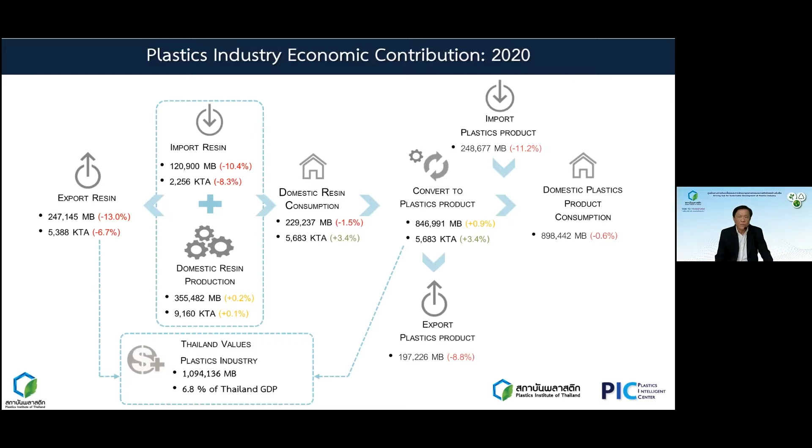The plastic product that we produce locally mainly go to the packaging, over 41% by the volume or the quantity. Following by the construction that cover the piping and the fitting, then electronic and electrical appliance, following by the automotive component, and the rising star is the medical device. These 5 sections cover around 80% of the total plastic product that can be produced locally.

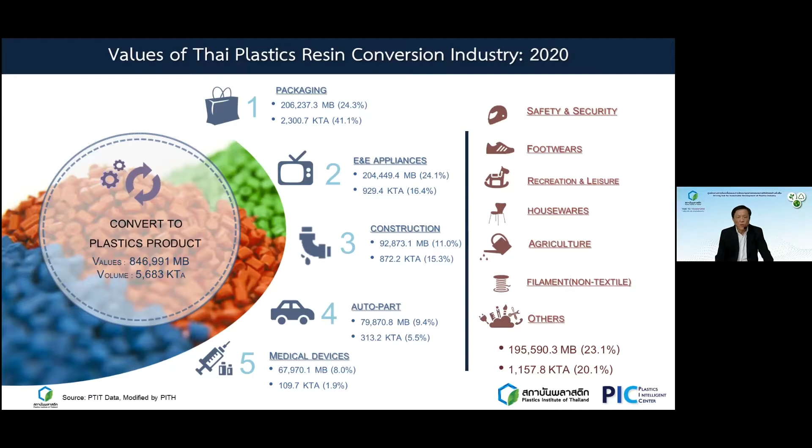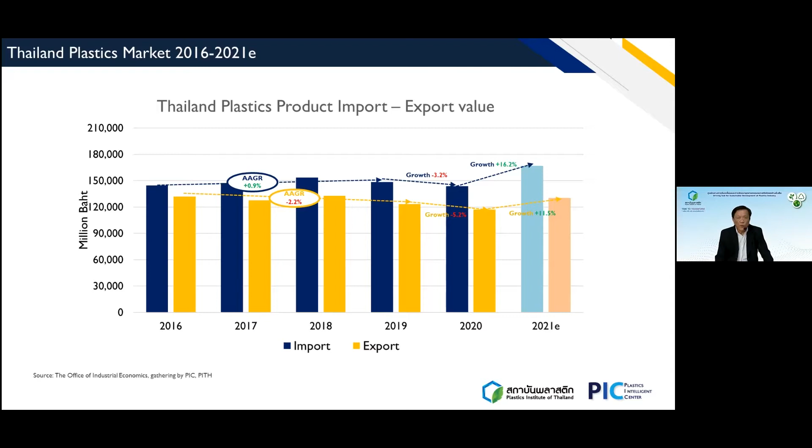So for the plastic product and even the other industry, Thailand and also the government have seen the importance and have put it as a national agenda that we want to be the smart manufacturing. How about the current situation in Thailand?

When we look at the plastic industry, the manufacturing that we have totally is over 3,000 manufacturers. We classify them into small, medium, and large by the number of employment. If the manufacturer has less than 50 employees, we call it small. Between 50 to 200, we call it medium. And over 200 employees, we call it large.

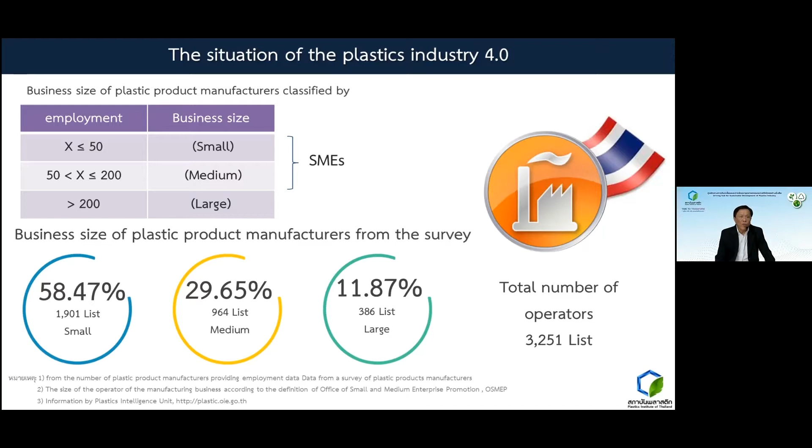Small enterprise already represents nearly 60% of the total, while the medium one is around nearly 30% also. Large one just represents only 12%. So overall, we can say that we have a lot of small and medium enterprises or manufacturers.

Thailand wants to move to the smart manufacturing. Let's see the history about the Thailand industry. We start with Thailand 1.0, that's been concentrated on agriculture. Even right now, Thailand also calls ourselves an agricultural country, but by the way, we want to transform ourselves to the industrial one. And Thailand 2.0, we start with the light industry and everything related to labor, since we have the labor intensive.

From Thailand 2.0, we step up to Thailand 3.0. We move it to heavy industry and also all the advanced machines. However, our goal is to move to Thailand 4.0, the creativity and innovation industry, and make us smarter through smart manufacturing.

Currently, over 80% of our manufacturing is still in the group of Thailand 2.0 and Thailand 3.0. We try to move ourselves, setting our goal as Thailand 4.0, and we hope it will happen soon.

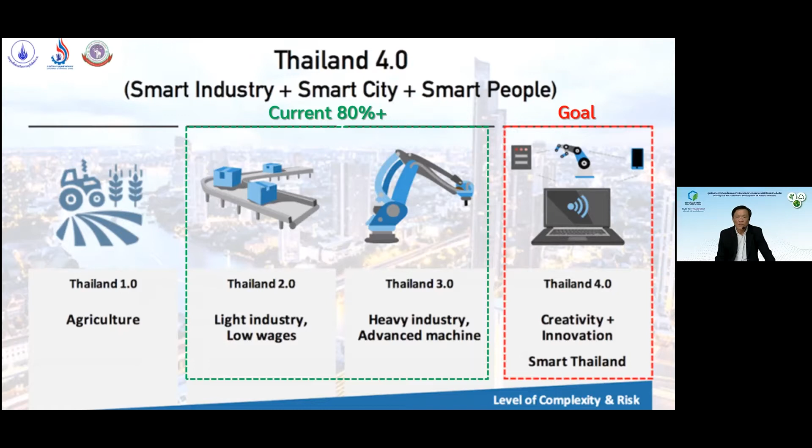From the business side, we have shown S, M, and L categories. Right now, S and M manufacturing represent nearly 90%, and all of them use old technology, old machines. Only the large manufacturing, representing 11-12%, use new machines and new technology.

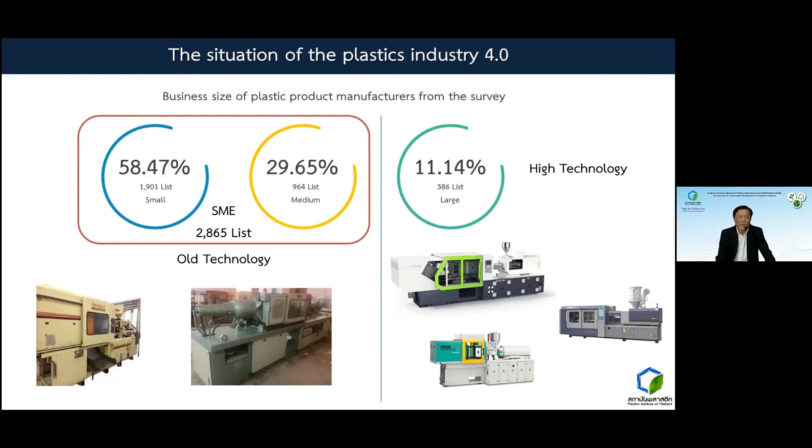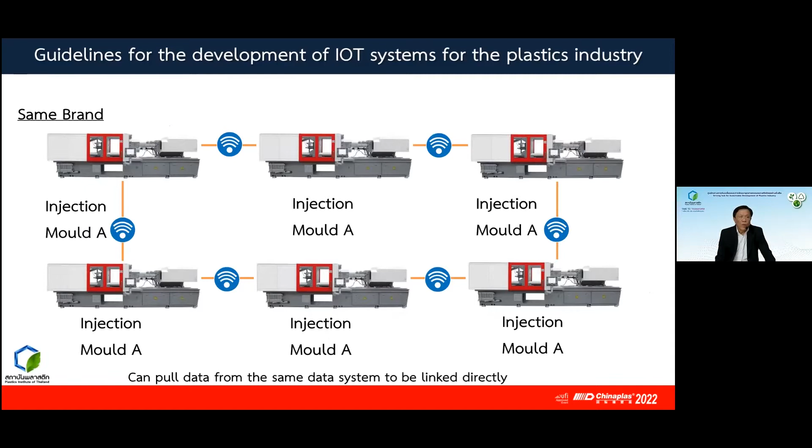That's why we face this issue when we want to move to smart manufacturing. When we talk about using IoT to connect all the machines, if they have the same brand, it's quite easy because they have the same language to communicate among themselves. But whenever we have different brands, different technology, or even different processes, we face the problem of how to connect all of them and let them speak to each other by themselves.

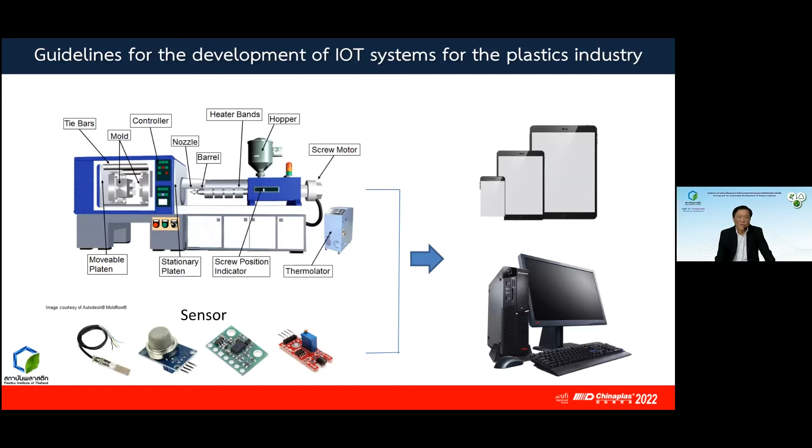That's why we need the technology. We need to implement IoT tools and equipment to install or fix onto the existing machines and make it digitalization.

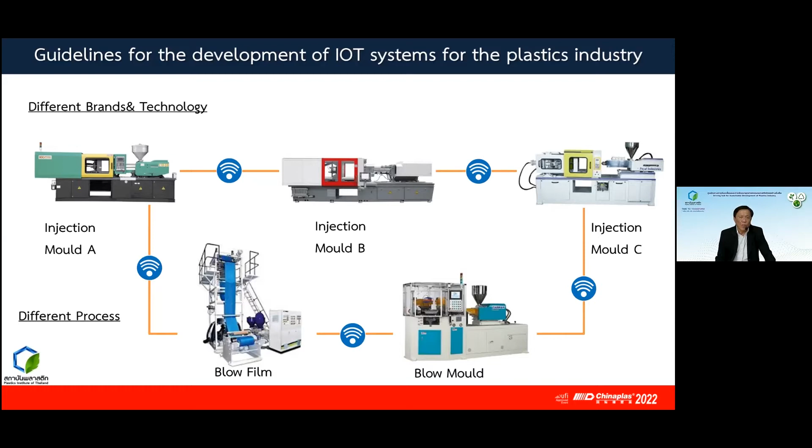With that, we believe that even with different brands, different technology, different machines, we can let them use the same language and communicate among themselves. This will increase the efficiency and effectiveness of the production and manufacturing.

Since the government has seen the significance of smart manufacturing, on the government support side, they provide consulting as well as knowledge to the manufacturers, and even share certain budget to upgrade and leverage the capability of manufacturing.

The government side as well as the manufacturing side have seen the same problem, meaning we talk about soft loans - how can they get lower cost for investment? By the way, getting tax privileges to give them some holiday during leveraging or upgrading their manufacturing.

So to upgrade to smart manufacturing, we have seen both challenge and opportunity. The challenge is that we lack knowledge - what kind of smart technology we should have, and the know-how on how to implement and utilize it. We face limited proper equipment, as I mentioned before we have faced high investment cost, and even right now labor is also in shortage.

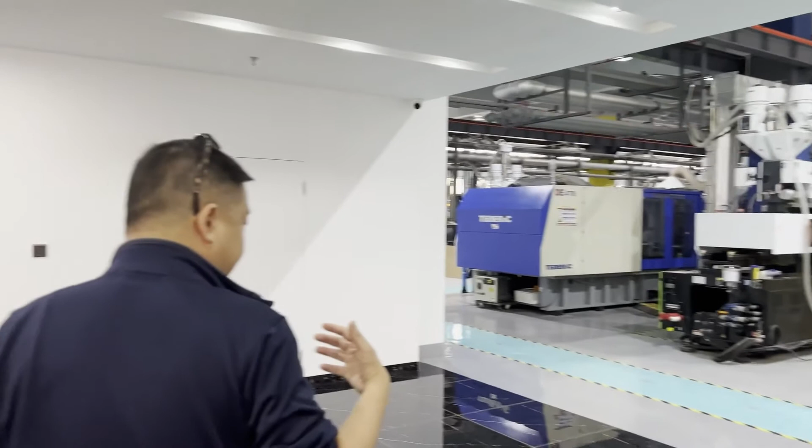At the end of the day, with such a manufacturing facility, this is a dream for many small micro converters, and it will take them quite a lot of effort if they wanted to build one themselves. By having a shared facility like this, it allows them to benefit from a digital factory at a fraction of a very small cost. This backdrop here is our experience in the past 18 months building these facilities.

Now we feel that to have a breakthrough in tackling the challenges faced by medium, small, micro companies in digital transformation, there should be a system engineer. Over here we say it should comprise industrial engineering, economic modeling, multi-skill talent, digitalization, and government services.

Over here we hire two groups of people. These are technicians with experience, born in the 70s and 80s, and these are also very young students that we now work with the school. They are born in the 2000s, very young age, 16, 17, 18.

We are trying to implement the German dual-track education system over here in Jieyang.

Why is it so difficult to actually implement such a system in traditional manufacturing in Asia? Because most of the companies are very small in size, and they do not have the infrastructure or the talent to do the German dual-track education system.

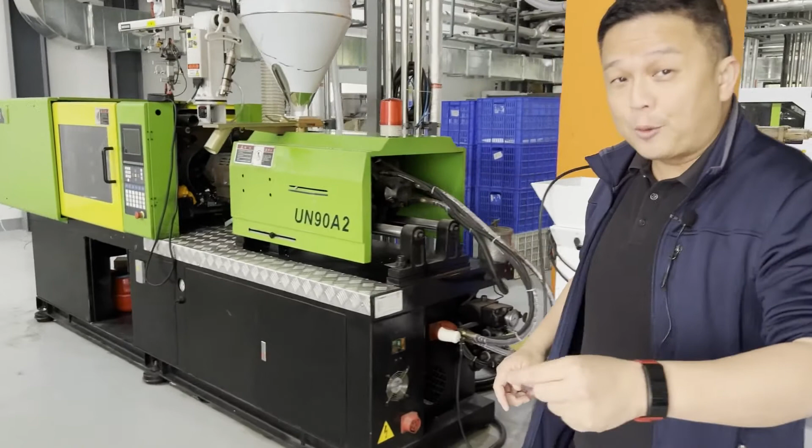We also say that if the industry, by and large, is not even automated, by letting them work with the schools, how can we then train 4.0 students? So we said that if the industry is 2.0, after they work with the school, it's never possible to train 4.0 students. So there's always a gap on employability of such students.

These facilities now, we have got all 31 machines digitally connected to the platform. So in this control tower, we can basically track quite a lot of data. All the machines are connected via the OPC UA standard, so we can do predictive quality in our manufacturing process.

What does this mean? Traditionally, maybe one technician can look after 10 machines. So when we have a technician plus a smart process monitoring software, can we then put a challenge that this technician should now look after 100 machines?

We built a very simple staircase gallery to just make full use of the space here.

In this wall here, we explain why the young generation doesn't want to go into manufacturing, because they have requirements on the environment, requirements on the salary, it cannot be too low, and plus I think they also, not like us when we were young, want to work long hours. So manufacturing has to change in order to attract the younger generation to come and work in the factory.

And we realized that not only do the students not want to work in the factory, their parents, who have been working in the factory for the last 20, 30, 40 years, also don't really like to see their kids go and work in the factory.

So we have this very awkward situation: when factories face labor shortage, their solution is to invest in automation. But the question we put to this converter is, if you already have trouble hiring general workers, what makes you feel you will now have the ability to hire skilled technicians?

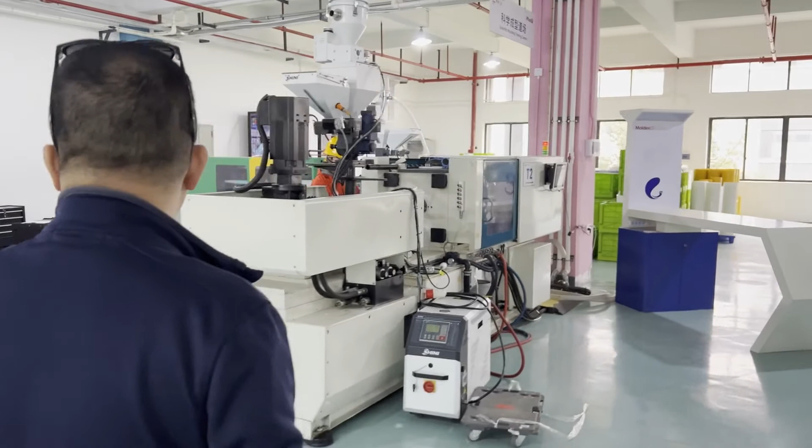They work in the future factory environment. So here we have 3 molding machines. We use them to do scientific molding training.

We have an automation training center where we have a swing robot, articulated robot, both industrial and collaborative, and also linear robot. Recently we invested in 2 more stations to train application of industrial robot. This place is also a licensed training center by the government.

So we have come to the end of the tour. I thank Adsale for inviting us to share with you our experience in smart manufacturing for the plastics industry. We are only 18 months into the operation.

There's still many things we can do and we will do, and we encourage more partners, either from the machine side, software side, or even the converters, to join us, because I think this is one very interesting project.

We are embarking on the Industry 4.0 journey together. Thank you very much, and I look forward to taking more answers and questions.

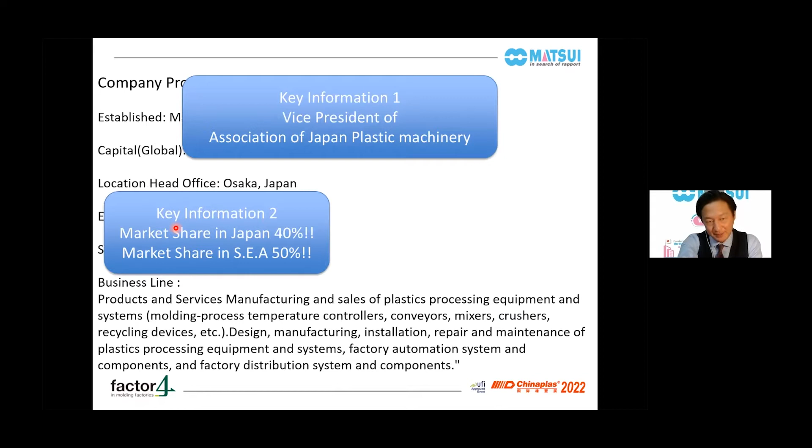And market share in SEA, the Southeast Asia region, approximately 50%. The third key information: we have a strong relationship with Japanese automotive manufacturers, especially Toyota and the group companies.

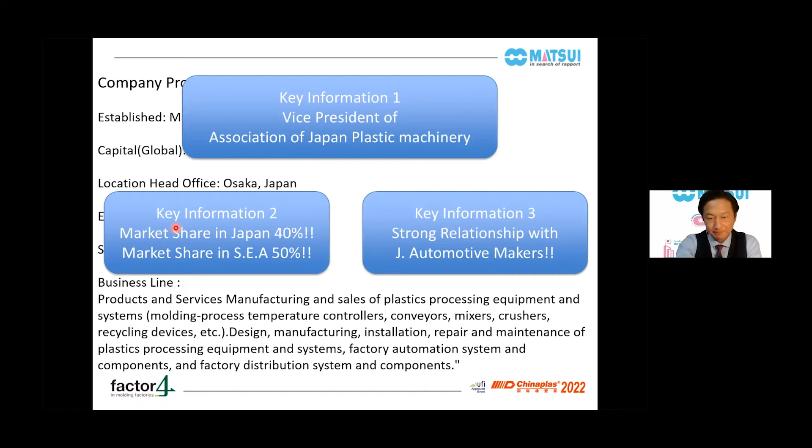One in Korea, one in America, one in Thailand, and one in India. Basically, we provide our equipment to the Southeast Asian market from Thailand or China, and provide installation and after-sales support.

That support is provided at each country locally.

Okay, let's get started on the main topics. First of all, let me share my idea through my activity and research about this topic since 2016.

Every player in the industry is saying IoT, Industry 4.0, and digitalization are mandatory for our future, especially after 2016.

There are a lot of services now, technology, software, and devices already in the market. But the main topic is usually how to connect the machine and how to upload the data, rather than the discussion of the purpose and the object of each molding process.

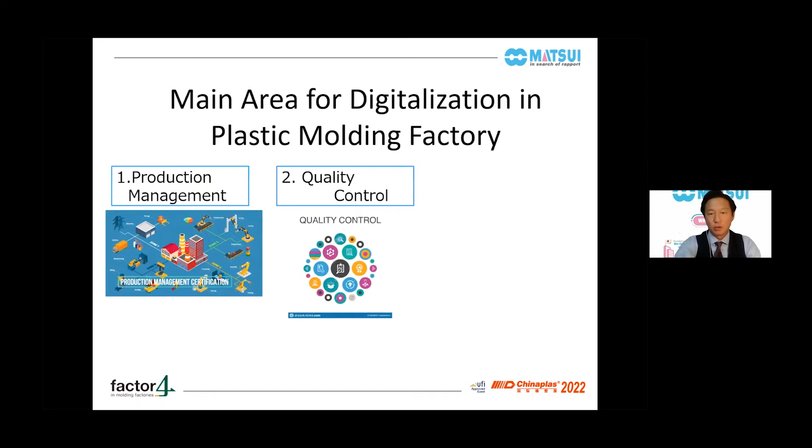And third, machine maintenance. Basically, these are the three main areas for digitalization in plastic molding factories.

Each area requires different parameters and information because of different objectives. For example, production management requires things like cycle time, material consumption, shot count. Quality control...

requires screw position, injection pressure, mold temperature, and machine maintenance covers motor failure, vibration, or the temperature of the heaters, and so on. So these parameters have to be matched with each area.

Basically, the cycle time information doesn't work for quality control or something like this. So that's why...

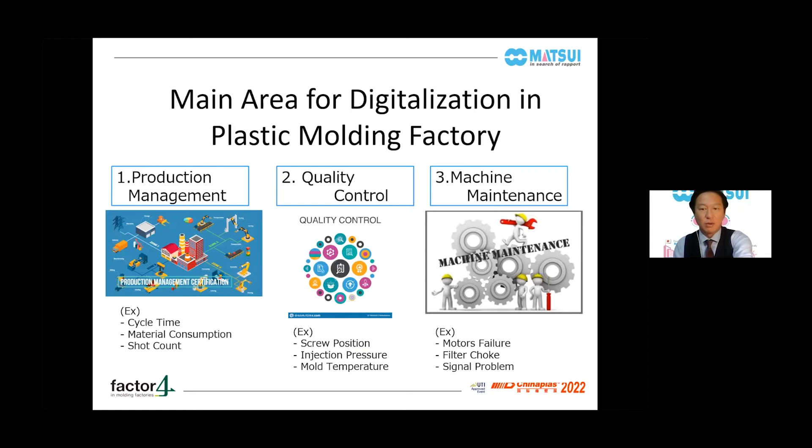we need to think about the target object clearly and implement the solution specifically. Then it's much easier to start, and also can save a lot of cost because of the small investment.

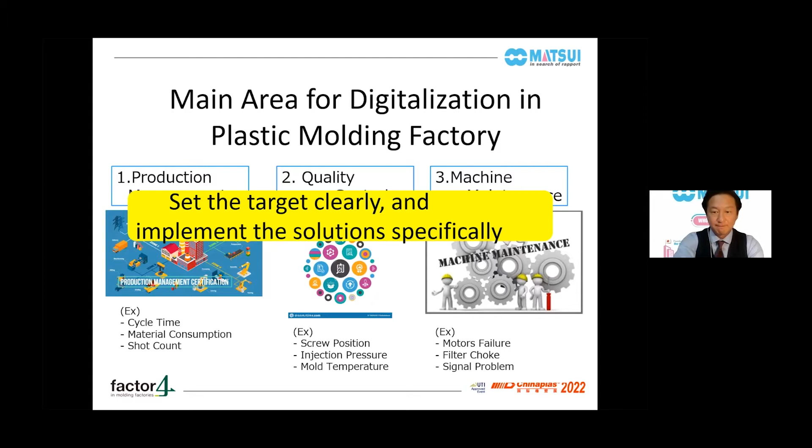Okay, but there is an obstruction to digitalization in the plastic molding factory. Obviously, there are two huge difficulties for implementing IoT in the plastic molding industry.

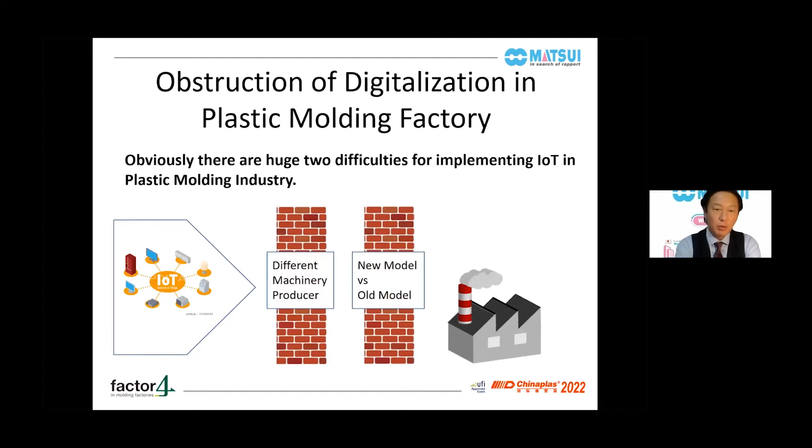The first, different machinery producers, and second, new models versus old models. This means each machinery manufacturer, like us, provides its own software, device, and services.

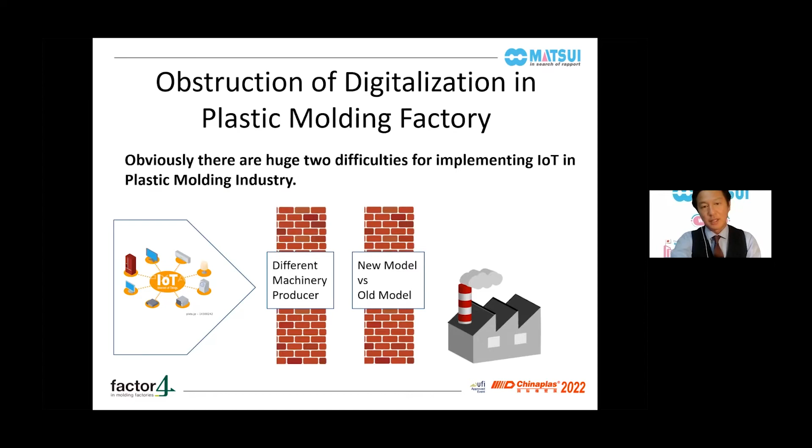Let's say the new machine is only available to communicate and give data, but the old machine is not able to do so. That's why there is no platformer in the industry.

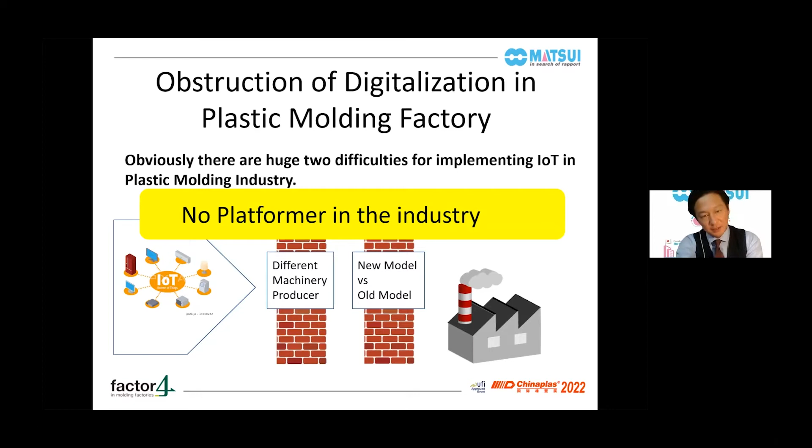Now, it's already past 5 years after 2016. This is the real situation everywhere in the world.

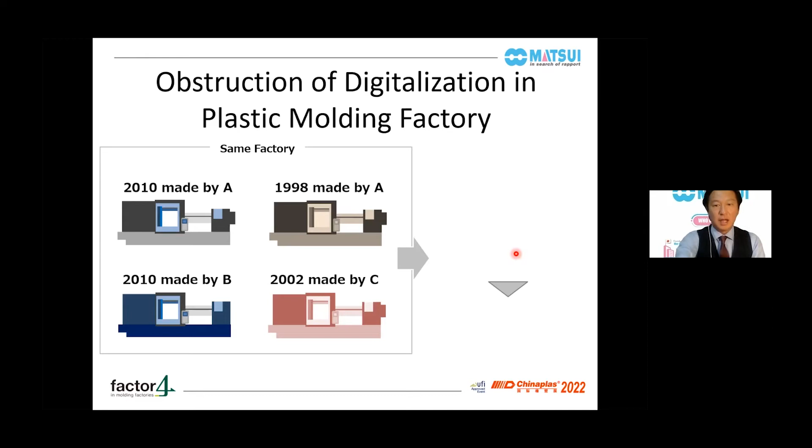And how to break through this situation? Actually, the external sensor is the key to success and the key to implementation.

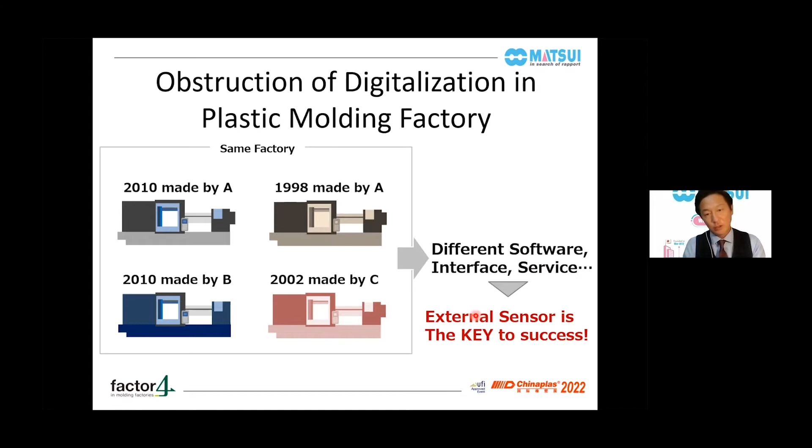Matsui can contribute to the digitalization in plastic molding factory with this idea. The slide shows like this.

Matsui is focusing on IoT service to help the quality control area, because this topic usually creates the most losses in terms of material, manpower, time, and energy. The QC program brings a huge headache to manpower managers, especially for managers of small and medium-sized enterprises, because they have multiple tasks usually, although they are not professional for QC issues and problems sometimes.

So we did some research in the field with customers, a lot of managers in this industry, to find what are the critical 5 points in order to catch the changing point, or to maintain the production quality and also to prevent the defect.

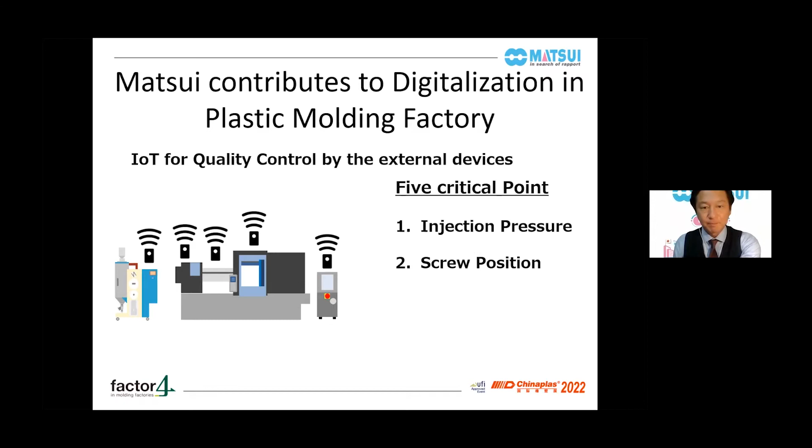So we squeezed, minimized, and picked up the 5 critical points like this: injection pressures, screw position, mold temperatures, material condition, and outgas.

Of course, the 5 points monitoring only requires much smaller investment cost, and minimizes some difficulty on the technical side to implement the IoT, compared to collecting a lot of information from the injection molding machine and other machines.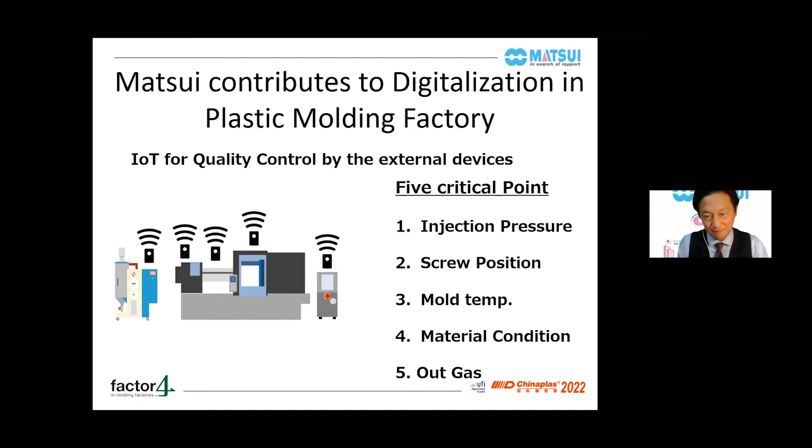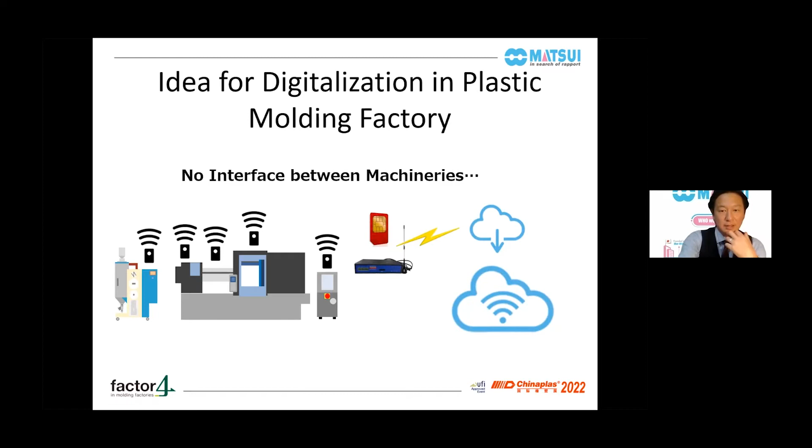In addition, there's no interface needed between the injection molding machine, auxiliary machine, and robots, depending on the target, because data from the sensor will upload to our cloud server via Wi-Fi or mobile network directly. This data can transfer to the cloud system to the customer directly as text data or CSV and so on. Basically customers have platforms like MES and ERP, so we don't need to communicate machine to machine based on OPC UA or SPI modbus. Sending the data to the cloud, and cloud to cloud, is a much easier way.

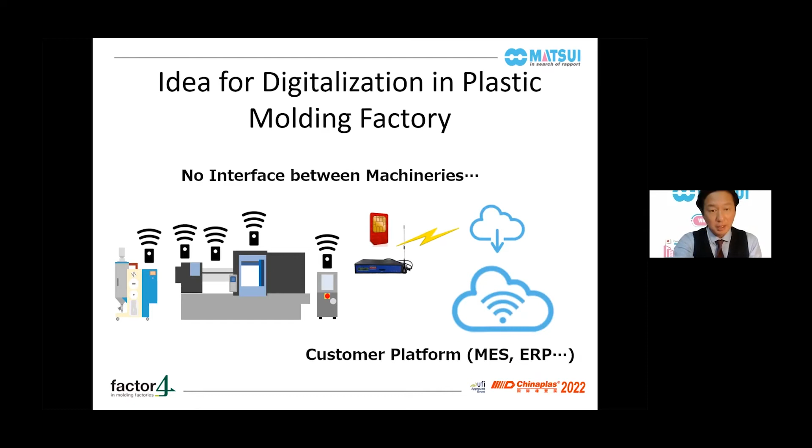So this is some idea for digitalization in plastic molding factories, especially for small and medium-sized enterprises.

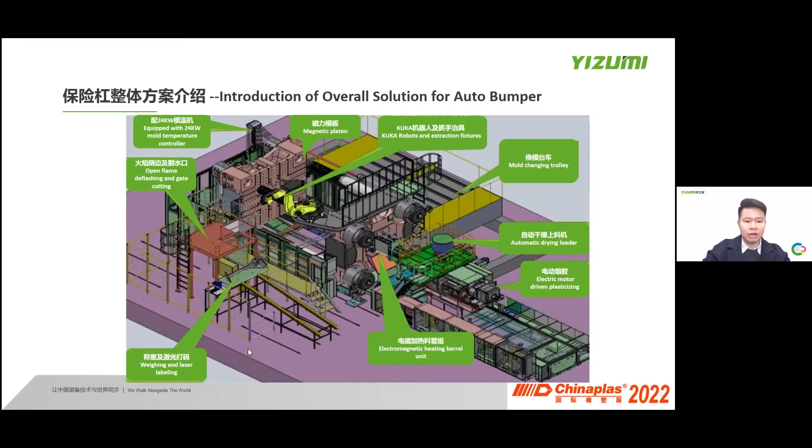As you can see, this solution is based on a 3,200 ton machine. This machine integrates lots of different options, for example magnetic platen, KUKA robot, mold changing car, automatic drying loader, electric motor, electric magnetic heating barrel heating, laser labeling, open flame deflashing, and gate cutting.

For this fast cycle time, we equipped German Kotler electric plasticizing, and we can make the function charging during mold open.

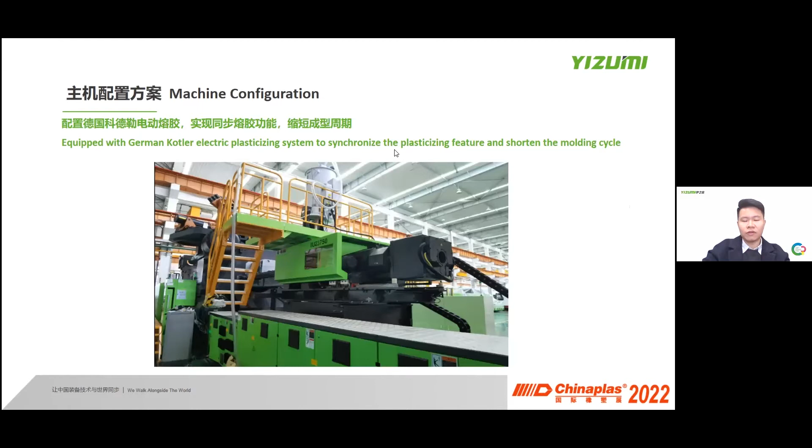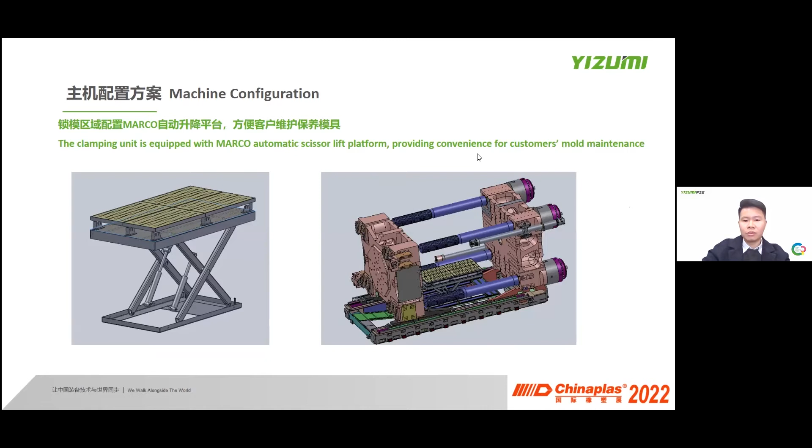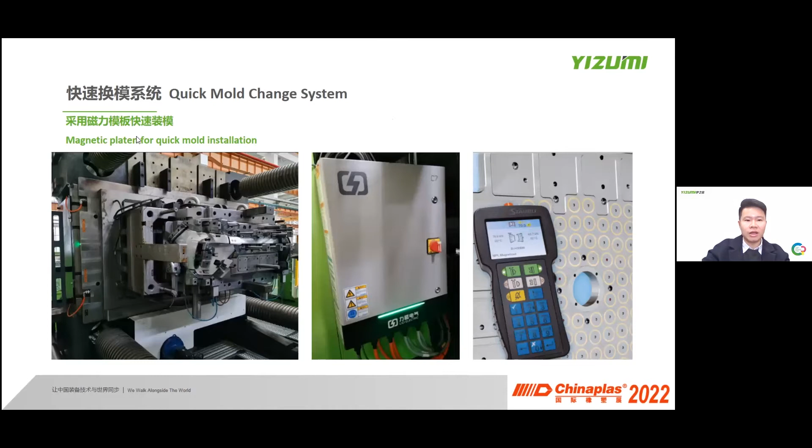In the clamping unit, we also offer the automatic lift platform, providing convenience for customer mold maintenance. We also equipped the magnetic platen for quick mold installation.

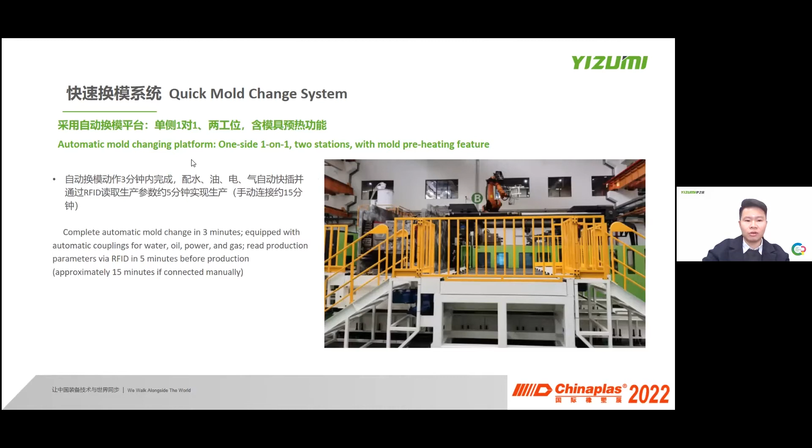As we know, the bumper mold is a big mold. For changing the mold, we also have the automatic mold changing platform. We can change the mold within 3 minutes.

When we change the mold, all the water, oil, and power need to change again. So we also integrated all of them to save time on connection.

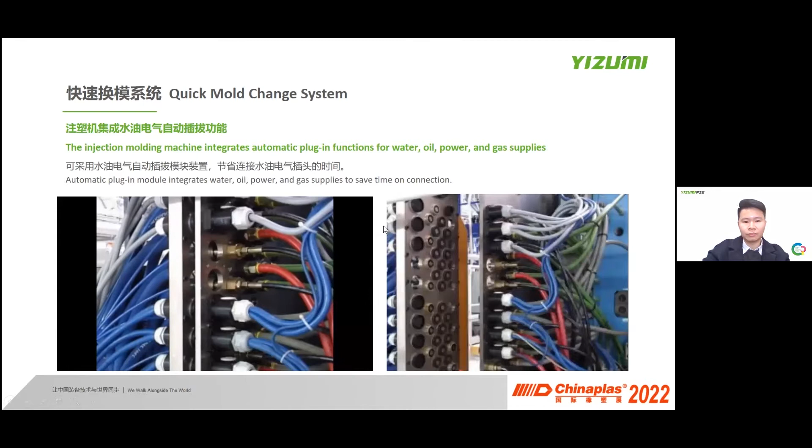This KUKA robot actually is an all-round soldier, in charge of many missions, including gate cutting, flame deflashing, weighing, labeling, and putting the product into the conveyor.

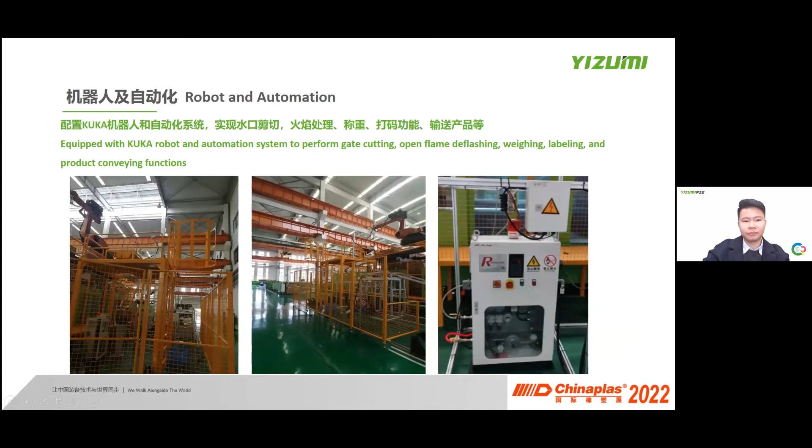Inside the robot, we also have the EOAT robot quick change device. After we change the mold, RFID technology will read the mold ID, so all the fixtures and mold machine settings will be uploaded.

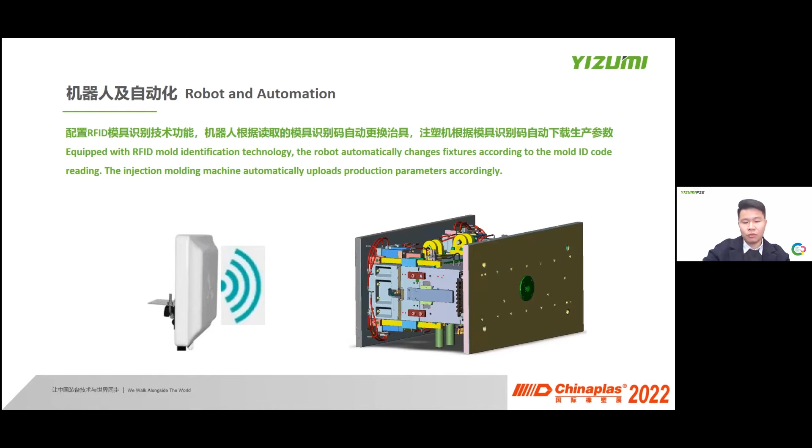Finally, all these solutions will be monitored by our YIZUMI Industrial Internet platform. Customers can check their whole factory's production situation by cell phone or computer.

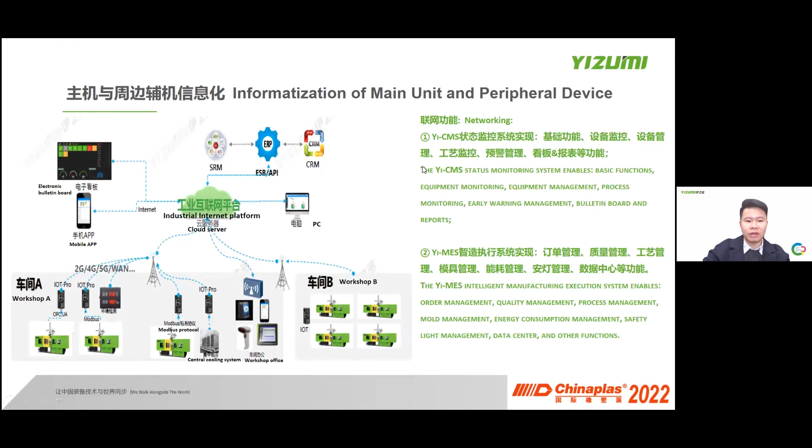The second part will be the foaming technology. The first part will be physical foaming.

It's a technology that injects a dose of supercritical fluid into the barrel. So when we inject the material into the mold cavity, it will be foaming.

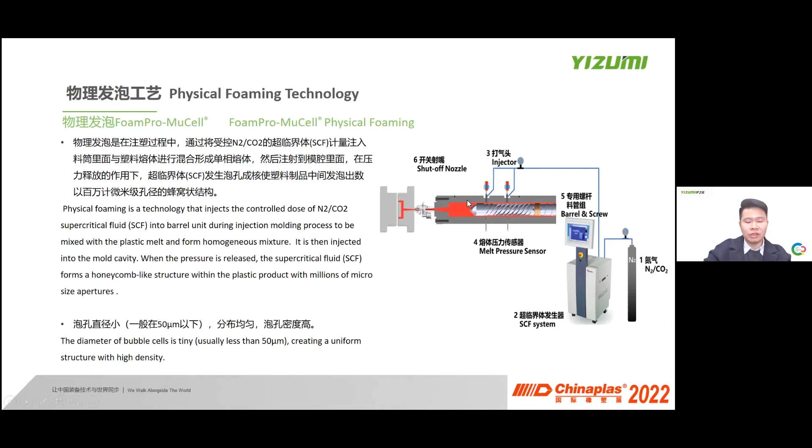The second part is chemical foaming. It's a technology that adds a certain percentage of chemical foaming agent.

It is injected into the barrel unit of the injection molding machine for plasticizing and mixing before being injected into the mold cavity.

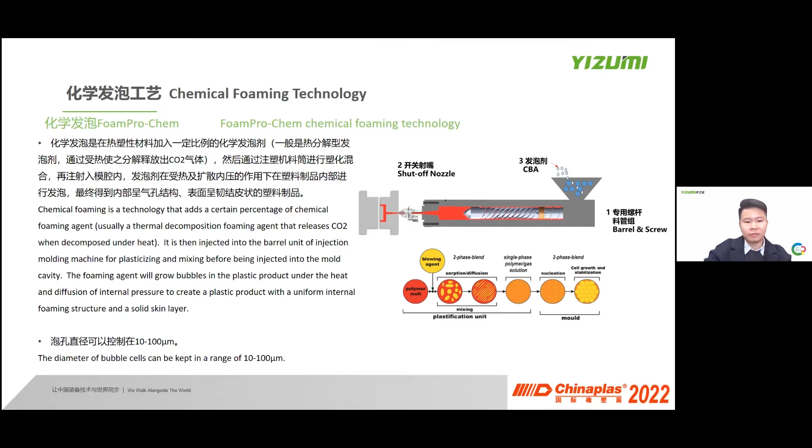The advantage of physical foaming is the gas pressure will be high, and it will be suitable for parts which have higher requirements and thin wall parts.

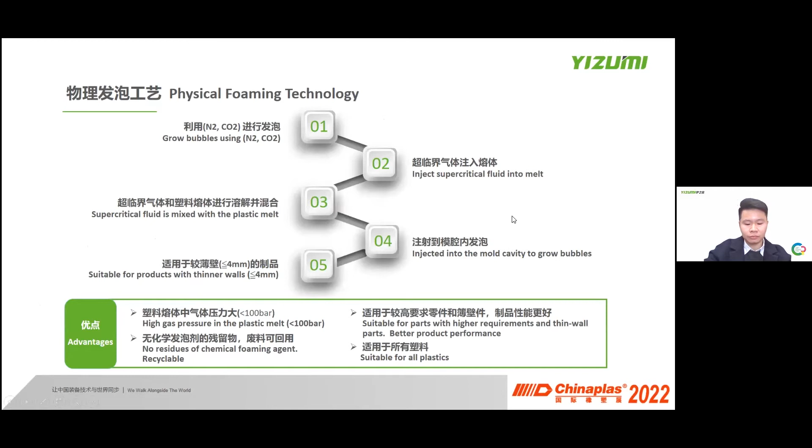The chemical foaming will have the advantage of fewer changes to the machine and less investment in equipment.

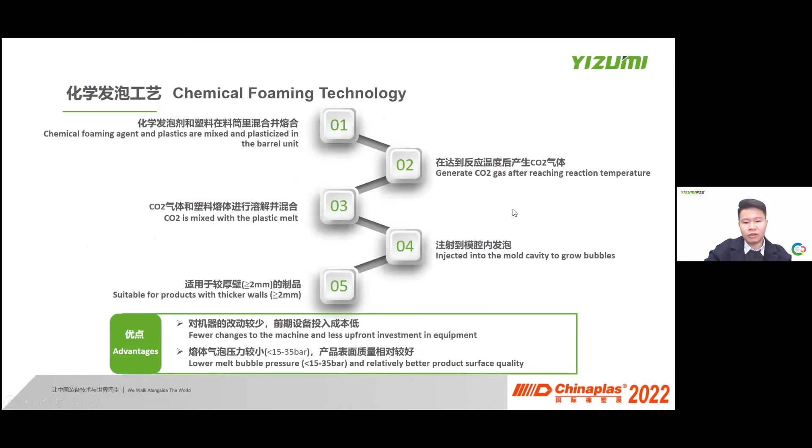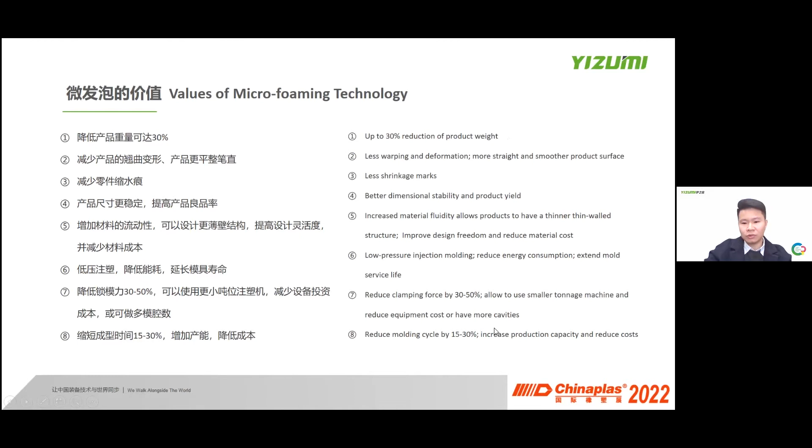There are so many values of foam injection. The most important is reducing the product weight and making the product have less warping and deformation. Moreover, it can reduce cycle time to increase production capacity.

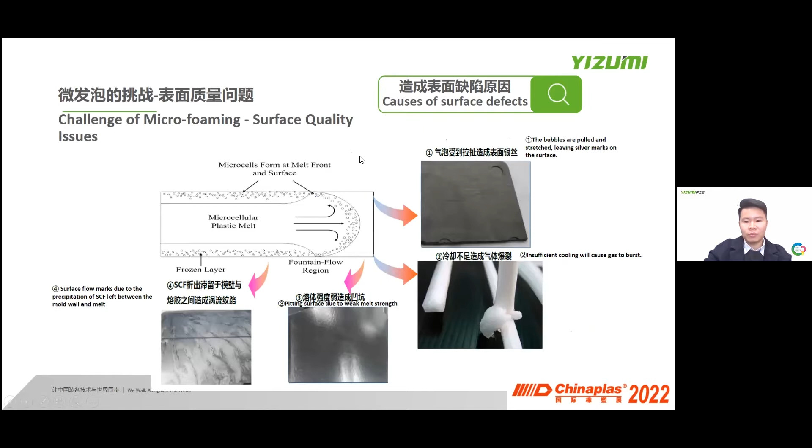But when we use the foaming technology, it's easy to have some problems with the product surface. Yizumi has already considered this. We also have another technology to control the surface.

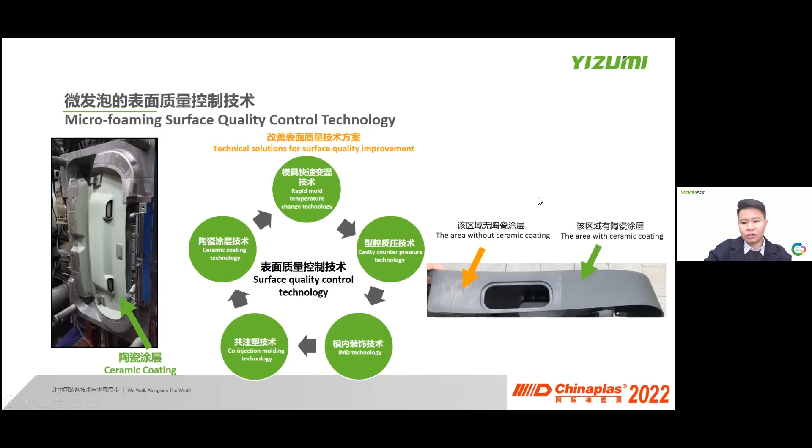We have the technology of ceramic coating on the mold. After using this technology, it can improve the product surface.

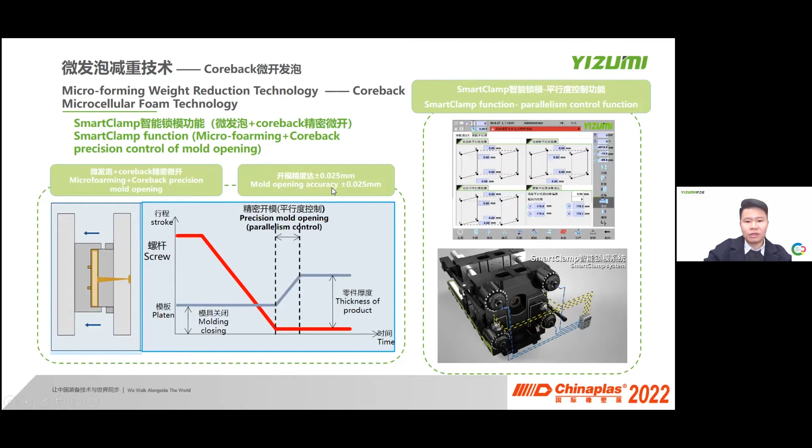When we use the foaming technology, actually the mold open control is important. We call this SmartClamp coreback technology. When the material is foaming inside the mold, we need to open the mold to make more space for the foaming. Our mold open accuracy is below 0.025 mm.

We also have in-mold decoration applications. This is the engine cover application. As you can see, we use physical foaming and the coreback technology, and in the middle area we also use in-mold decoration with aluminum film.

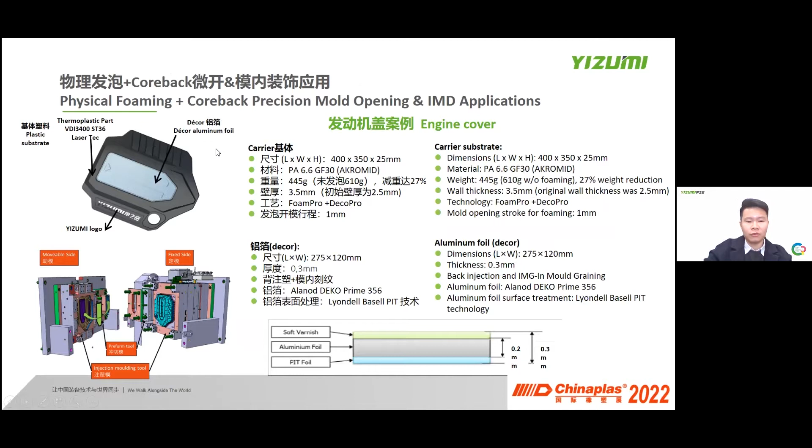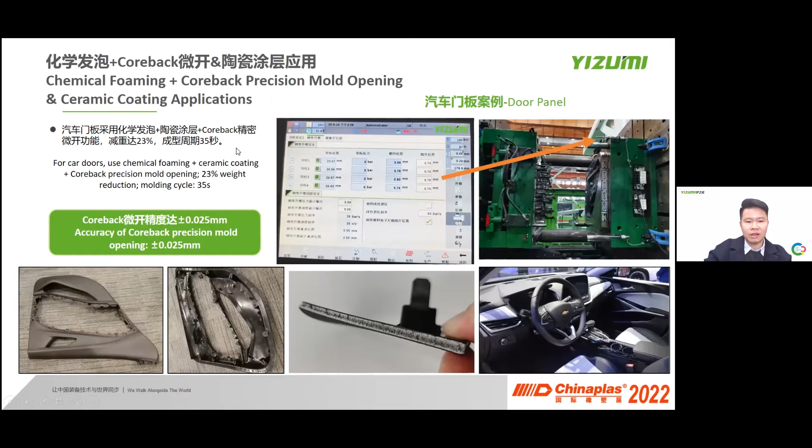The other application is the door panel. This application uses chemical foaming and the coreback technology. It can reduce the product weight by 23%, and the cycle time is 35 seconds.

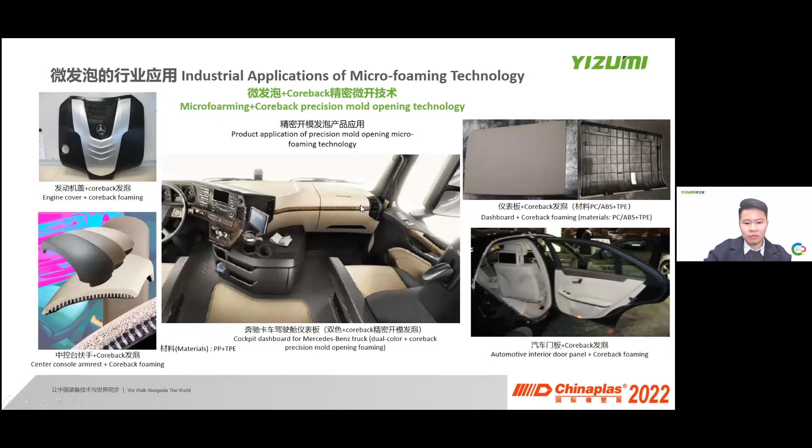Moreover, we can use this technology in more other products. For example, the dashboard of Mercedes, and some A-pillar trim and AC panels, also leather.

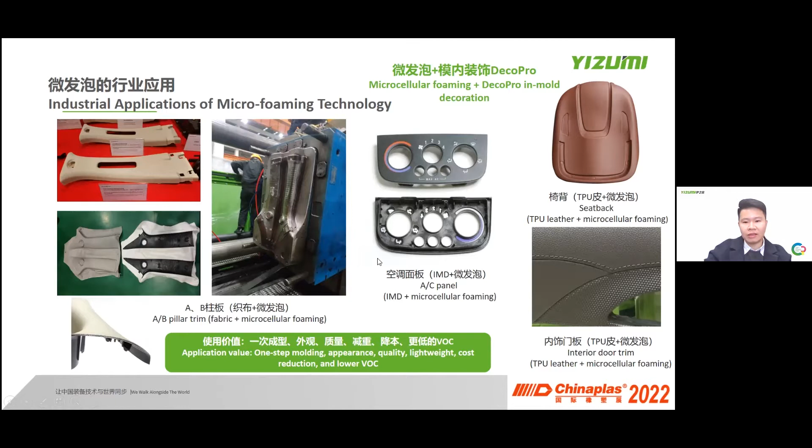The third part is low pressure injection molding. This technology is actually applied when we begin to inject. When we begin to inject, the mold doesn't close completely.

So we can use this technology to reduce the injection pressure and the clamping force. This technology is more suitable for products which have a large projected area and thin wall.

For example, the automotive sunroofs, pillars, and pillar trim, and other parts.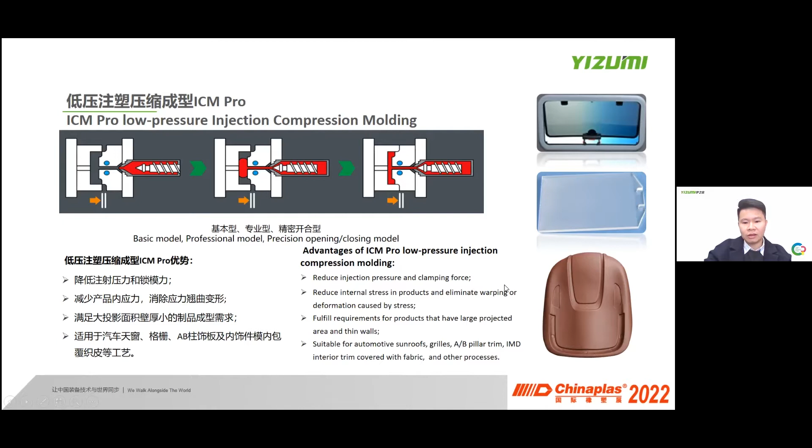There are two types of compression for this technology. The first one is sequential technology. It's suitable for the thick wall part.

The second one is simultaneous. It's more suitable for the thin wall large part.

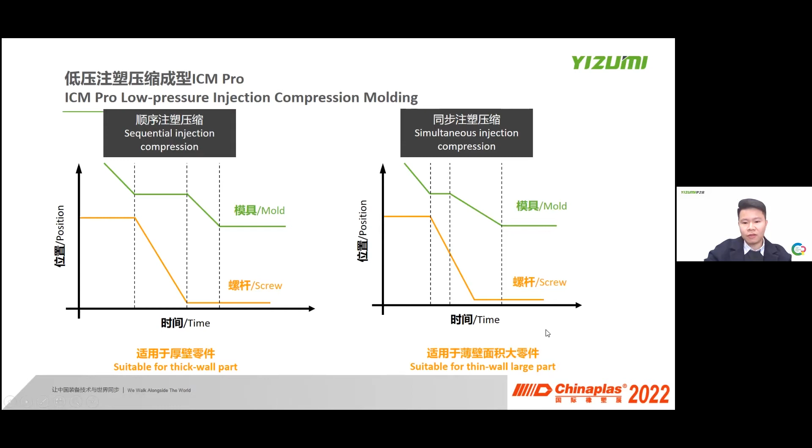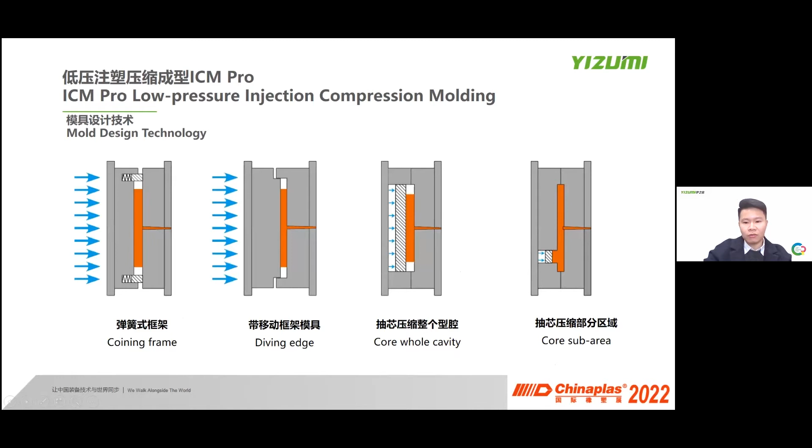For this technology, there will be some requirements for the molds. Below 4 kinds of mold can be used with this technology.

When we use this technology, the most important thing is to control the clamping unit. So we can see our smart clamp technology again.

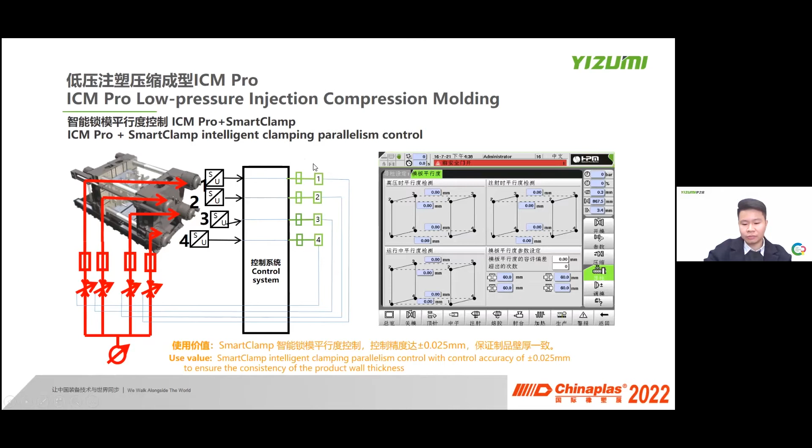So what can we use this technology for? For example, the tailgate D-pillar trim, and the rear side window glass.

Moreover, in this Hyundai concept car, they used PC instead of glass. So it's more helpful for design freedom.

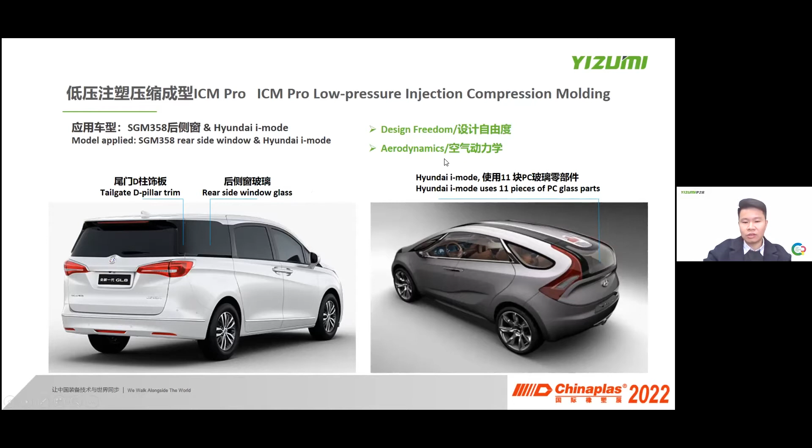More applications will be used in new energy automobiles. For example, the display and the grille.

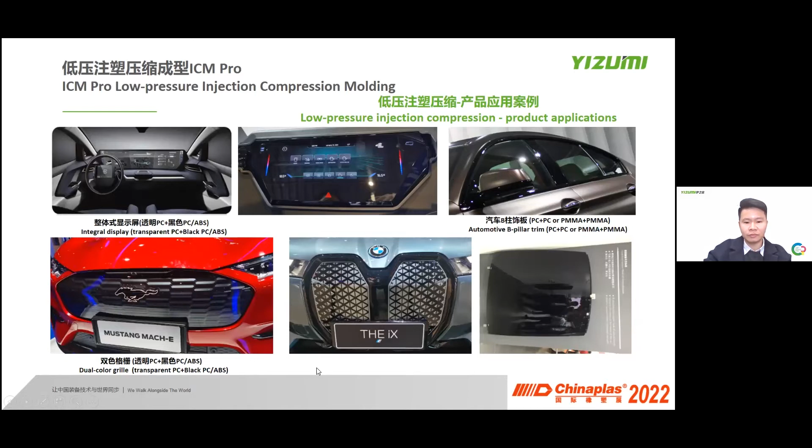With our advanced mold solutions, we have a lot of corporate partners. We can see more and more global brands choosing to cooperate with Yizumi because most of them have a requirement to reduce investment. At this moment, Yizumi will be one of their best choices.

This is my topic today. Thank you so much.